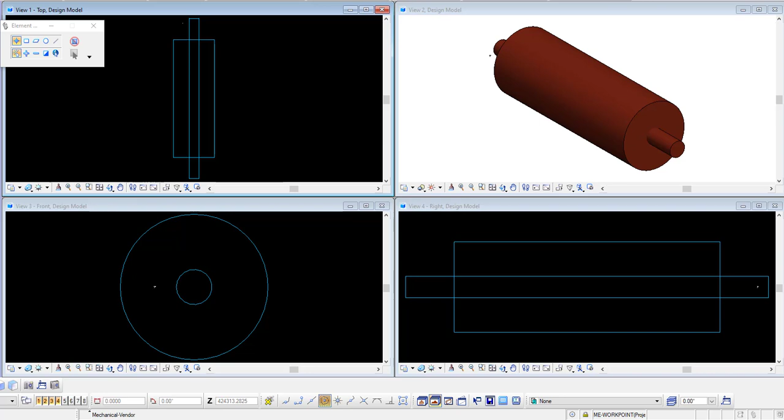Here we want to demonstrate how, just by doing what we always do in 3D designing a mining project—this one in particular is a conveyor tail pulley—we want to add some bearings to it. But before we do that, we'll just go in and have a look, and I'll show you how this already has data associated to the tail pulley.

The non-drive tail pulley is an 800 diameter, 200 diameter shaft, 2.2 meter wide belt pulley. It's from Prok, and this is its Prok drawing number, from the Prok Nepean Conveyors catalogue. It's a non-drive pulley, and there's all the details, and it even shows it's got steel rubber lagging. So we've already got all that data that came from our library associated with that tail pulley—one model, we've already got data.

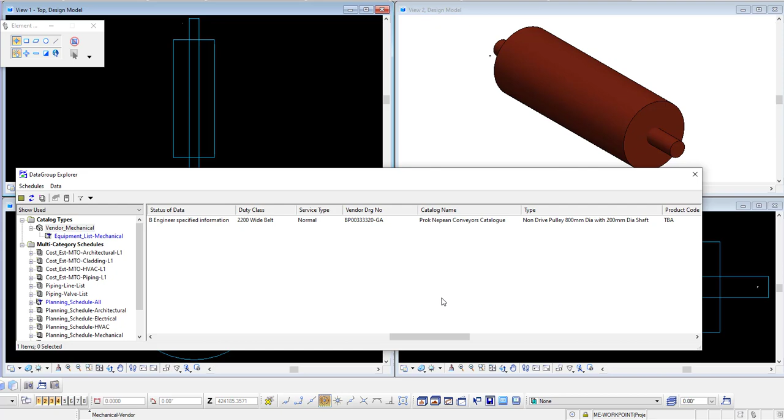So now let's go ahead and add two bearing housings to it. With this system, we've got tens of thousands of vendor and standards models already built for the system that comes with it when you install it. In order to find that many items in that many libraries, we found it necessary to create a user interface so that it was logical and easy to find things. And obviously, the more libraries we've got, the faster it is to do the design.

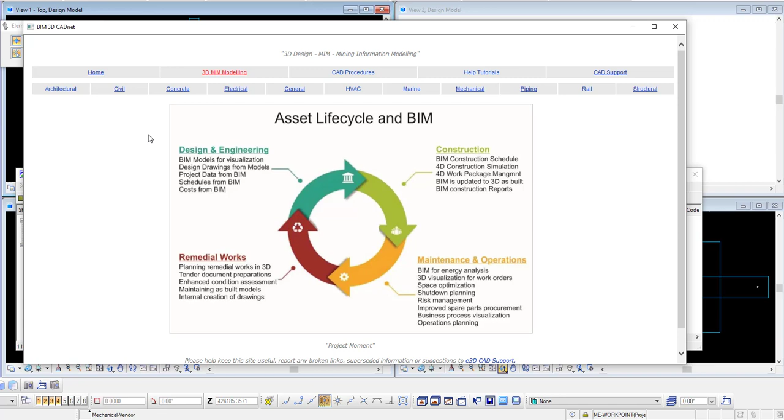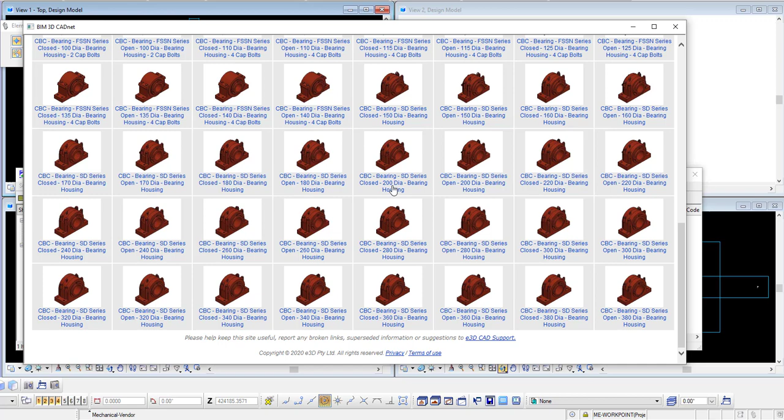So I'll just introduce you to our 3D CADnet user interface, where we want to do some 3D modeling. What we're after is a mechanical item, a mechanical vendor item. So then we'll go to conveyoring, bearings, and we'll choose CBC bearings for this instance—that's a design decision, normally made by the client who has a preference in which bearings they want to go for. Each one of these has a picture and description describing exactly what it is you're choosing, which helps with your design decisions. In this case, it's 200 diameter shaft, and we want it to be a closed bearing. So we'll choose that, and I'll just choose a particular item—there we've just inserted a bearing housing.

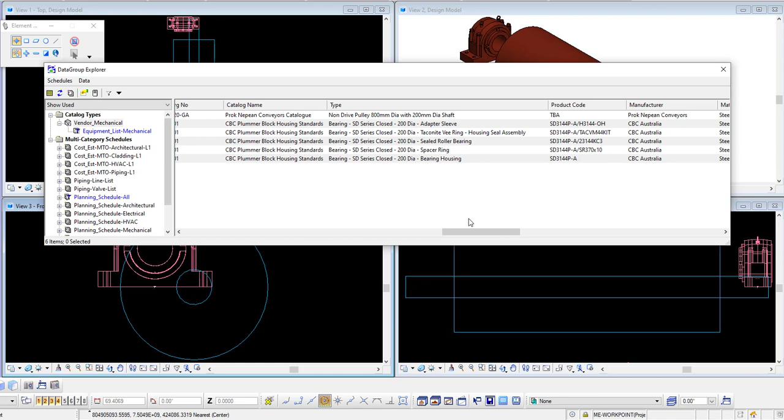Now you can see instantly the data about that bearing comes into our data group system, ready to go to all the other parts of the project for digital engineering to happen. You can see it's got its adapter sleeve, its housing sealed assembly, its sealed roller bearing spacer ring, and its bearing housing, with all the part numbers there, and who it's from—so it shows where this information came from.

We can also go back and see project-related information that you can apply to it if you want to—that's a choice. So now we've got one bearing in. I'll just move it to the right location, and then copy it across—so we've now got two, and you can see it's instantly added the second bearing with all the parts. Because it's got all the parts that make up that bearing, it's ready for asset management—if you needed to replace any of those parts, you've got all the product codes already built into it. You saw how fast and easy that was to do.

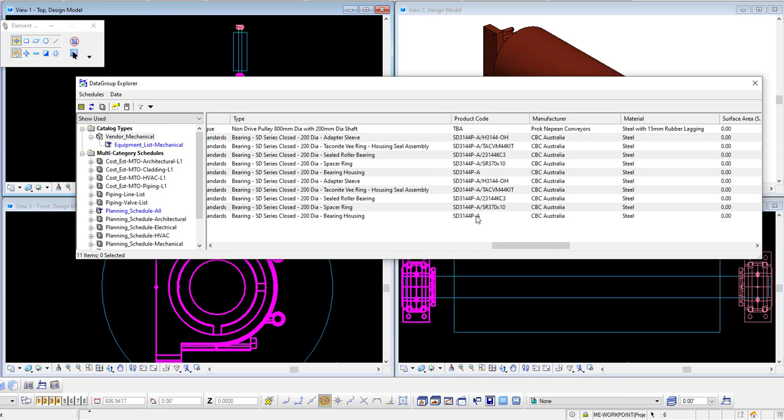No one had to build any models—it came purely from the libraries. That's what building information modeling, or mining information modeling, is about for the mining industry. We've tailored it so that it's got all the relevant information built into the system for doing mining projects. Digital engineering is what's going to happen with all these models and data after we've done the design, or even during the design.

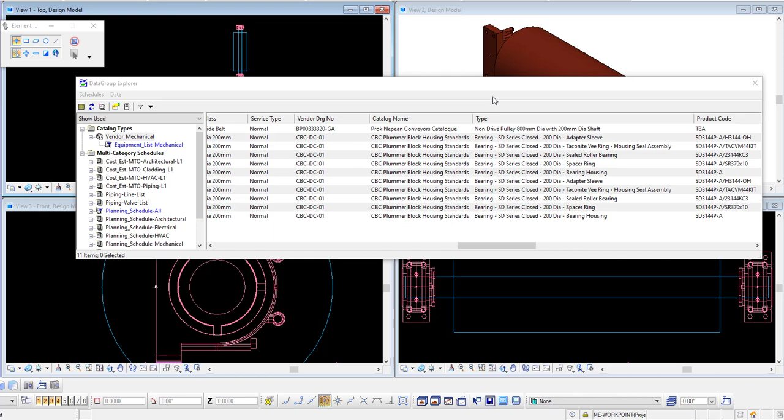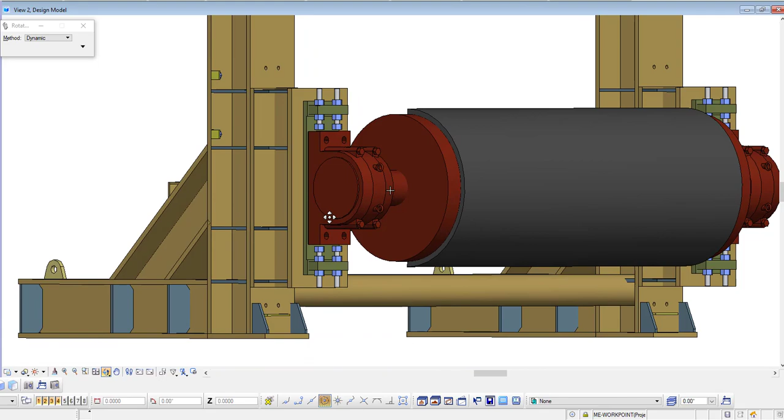Now let's go and have a look at the data that comes with that. Here we've got our section name, we've got all the flat bar in there, we've got all the plate. Once you select it here, it highlights in the software, so you can actually drill down to each individual one. If you right click on it, you can zoom into that and see exactly what that plate's referring to.

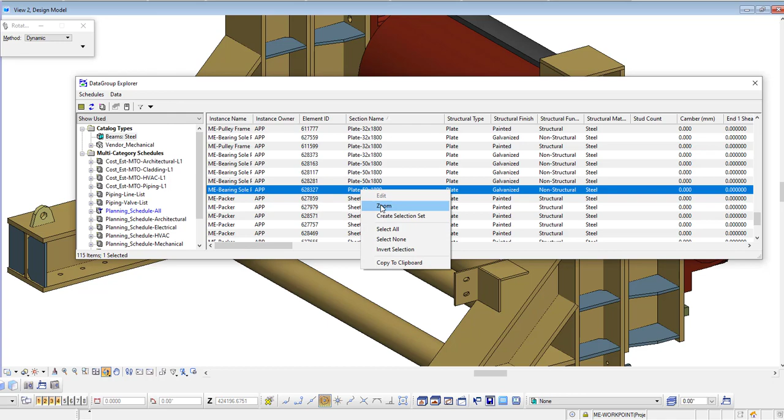Not just that, it has all the other data associated to it—what its weights are, how long it is, all the information, and how it relates to the project. It's a plant conveyor, it's a pulley frame, it's mechanical. You can see it's got the commodity code, and what the part is—whether it's a sole plate, packer plate, or a bit of steel work. So you can see it's mostly plate work.

But what it does is give us a single source of information that is generated directly from the model as the information for the whole project. That's what gives you the base to do digital engineering.